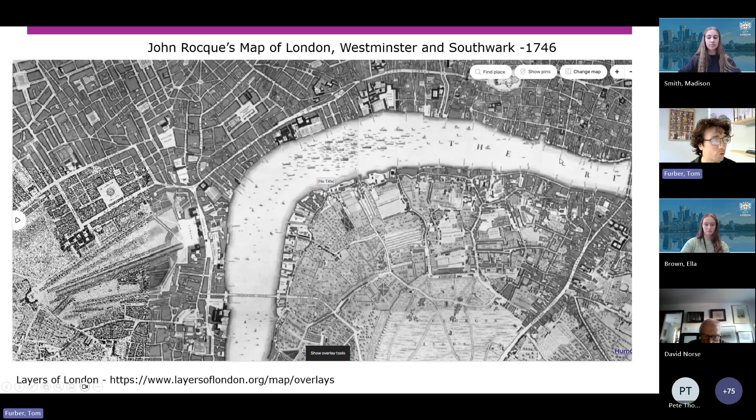One of the very big changes that comes to the River Thames in the 19th century is the building of the Victoria Embankment, built in the 1860s. The story of the building of the embankment is most closely linked to the huge sanitation and sewage problems London faced in the 19th century. The increase in population, and the rudimentary, incremental but not full progress when it came to dealing with human and other waste, meant more detritus, human, industrial and otherwise, was ending up in the river than ever before, causing all manner of problems. A new sewerage system was built under the auspices of the Metropolitan Board of Works and Sir Joseph Bazalgette to deal with that sewage problem.

That's the most famous story we think of when it comes to the embankment, but as this image from the Illustrated London News shows, there is much more to the embankment than a sewerage system. We can see the sewage system there, and also two types of railway, the more familiar steam railway, but also a pneumatic railway that briefly ran. We can see a river wall, a sea wall, being built alongside as well. This is now part of over 200 miles of walls that line the river from the mouth of the river to Teddington, where the tidal portion of the Thames ends. As an aside, one speculation of the etymology of Teddington is 'tide ending town.'

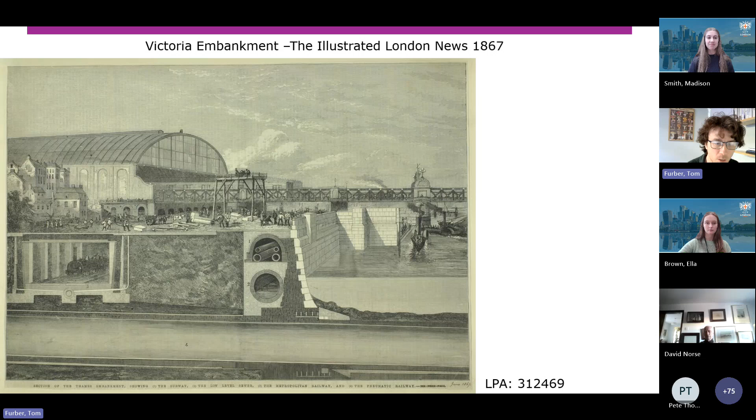One way we can compare and get a sense of the changes of the River Thames, and other changes in London, is with a great online resource called Layers of London, which the London Archives and many other archives, libraries and institutions have contributed to. If you're interested in London history, or in the course of the river, I really can't recommend this source enough. What Layers of London allows you to do, as the name suggests, is overlay various maps of London on top of each other, historical maps and contemporary maps as well.

The maps have been geo-rectified, a process where you take an older map with a lower standard of accuracy, and a modern satellite derived map, find matching points on each, and then make the older map conform to the accuracy standards of the modern map. You lose something of the artistry when that happens, because it distorts and pulls the older map in different directions. But what you gain is the ability to make a direct comparison of then and now on a geographical basis. If we do that with the Rocque map, again from 1746, you really get a sense of how much of the river was reclaimed during the 19th and 20th centuries.

Indeed, one Victorian engineer, James Walker, puts it very vividly. He says that if the walls were removed, the Thames would, at the very next tide, take possession of a large space that had been so long abstracted from it, and would be generally five times its present width.

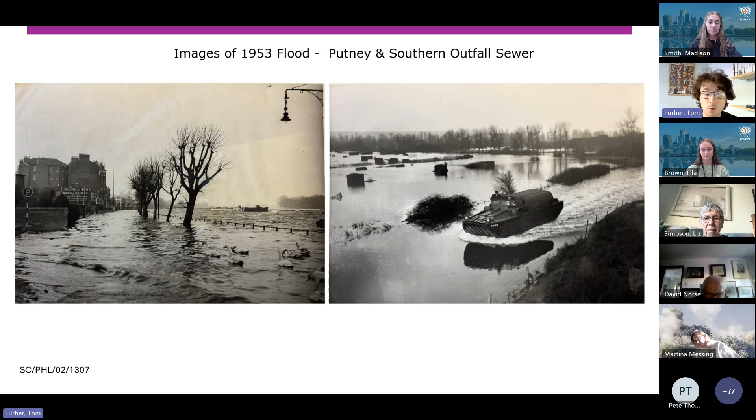As you might imagine, this prompted many concerns about flood defences for the future, and these are addressed in a public information film from 1975, which I'll play now. Any issues with the sound, please let me know. I will say it is an old film, there's a bit of an issue with the quality - it sort of pulsates slightly, giving it an unintentional psychedelic effect, which I hope adds to the charm rather than is a distraction. So I'll play that for you now.

Tide levels have been increasing steadily, particularly since the late 18th century, when a recorded tide reached almost 14 feet above the Newlyn sea level line. During the next 100 years, a clear pattern was emerging - each isolated, exceptional high tide was higher than the last. By 1928, a high tide had reached 17 feet above the Newlyn line, and London's defences were overtopped.

Those defences were improved and strengthened in 1930. But in 1953, a high tide again overtopped them and breached defences in many places in the lower estuary. By 1972, new defences had again restored the safety margin. But even these defences are not a permanent solution, and as the trend of higher tides continues, the question must be asked: when will London be faced with a total flood disaster?

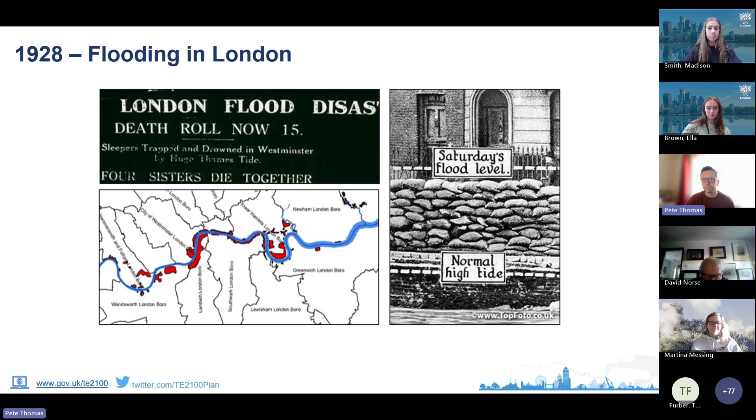Tom also touched on 1953. It was a huge East Coast tidal surge that came down the North Sea. London was largely spared, but that was only because of very significant flooding towards the mouth of the Thames estuary. Water levels were almost 0.5 metre higher at Southend than in 1928, although only 16 centimetres higher at Silvertown in London.

Over 300 people died in England, many of those in Essex. One person died in London, and that was due to gas exposure rather than directly from the flooding. Over 25,000 properties were damaged, 30,000 people evacuated, and over 100,000 acres of land was flooded along the coast. As Tom alluded to, the impacts were even greater in the Netherlands, where over 1,800 people died.

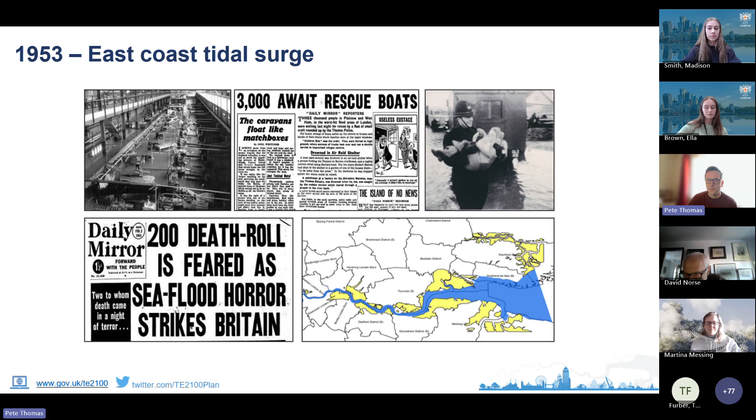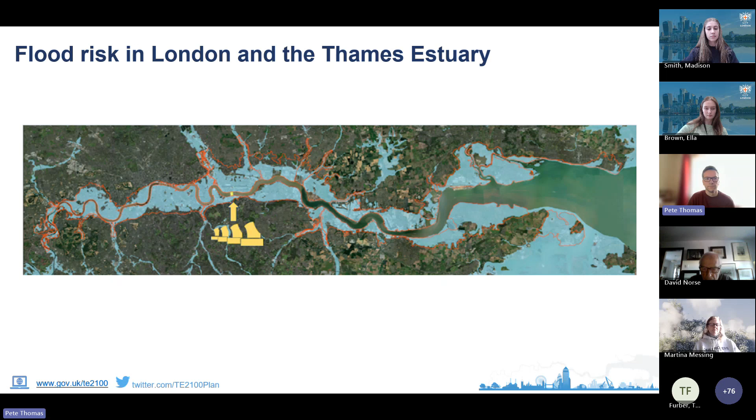So a bit of information about some of the existing flood defences in London. Some of them are now well over 150 years old, deteriorating with age and through increased use through climate change. Some of the defences are part of buildings, others intersect with bridges and wharves, and some are close to or actually part of World Heritage Sites.

This photo is of the defences near Trinity Hospital in Greenwich on the South Bank. In the top right, you can just see that white tower with the clock face - that's Trinity Hospital. This photo is regularly used by the EA. You can see multiple lines of defence raising over the decades, up to about 5 levels of raising here. That's been reactive to past flooding rather than strategic looking ahead.

It's not been planned. So you've got the 1879 Flood Act, you've got another raise later in the 19th century. After the 1928 flooding, you had the 1930 Flood Act, which then raised even further. And then the top concrete section - those were the interim defences constructed in the 1970s during the construction of the Thames Barrier, post-1953 flooding.

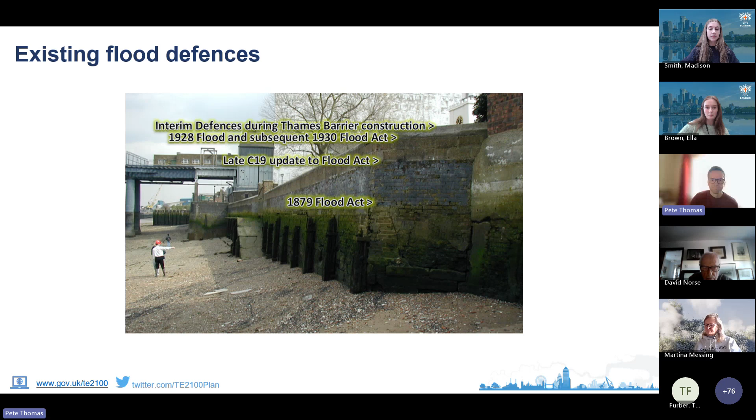So onto the Thames Barrier. The decision to build a barrier was based on a report by Sir Herman Bondi in the 1960s, who reported that a major surge tide in London would be a disaster of the singular and immense kind. It would be a knockout blow to the nerve centre of the country.

Ultimately, Charlton or Woolwich Reach was chosen because it's straight, it's quite deep, but it's not over wide. That kind of straight reach is important for navigation, so boats can straighten up around a bend and safely pass through. Construction of the barrier as we know it began in the 1970s, led by the Greater London Council, as it then was.

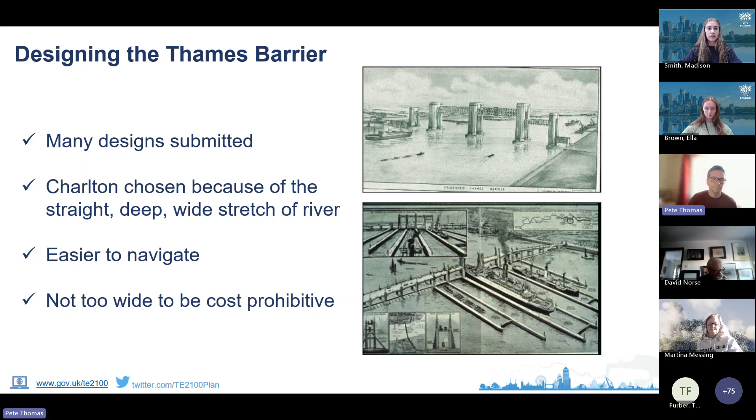So the main objective of the Thames Barrier is to prevent tidal flooding in London. It has multiple power sources, the gates operate independently, and it needs to have total reliability to operate when it's needed. We work closely with the Port of London Authority on navigation, and we think the annual closure limit is about 50 to minimise the impact on navigation and ensure we've got sufficient time to maintain the barrier.

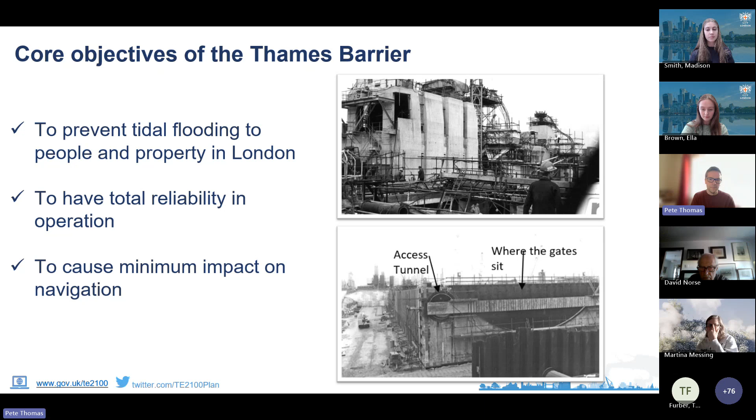So there's the Thames Barrier. I'm sure you probably all know what it looks like. That was completed in 1982. It was first operated in 1983 and officially opened by Her Majesty the Queen Elizabeth II in 1984. It cost £461 million in 1982, and that's about 1.5 billion in today's money. And about £100 million, or £300 million in today's money, was used on those interim defences, that kind of extra concrete section on top of the defences through London while the barrier was being constructed.

It's one of the largest movable flood barriers in the world. The upstream walls and embankments are lower to allow greater use and enjoyment of the river while keeping the day-to-day tides within that river channel. The Thames Barrier itself is closed when surge conditions threaten to overtop those defences in central London.

And the next slide is a fairly basic video of actually how the barrier works. Hopefully this sound works now. Please shout if it doesn't.

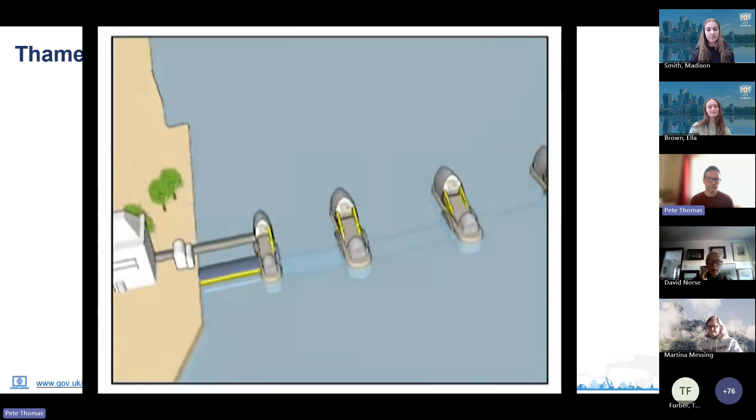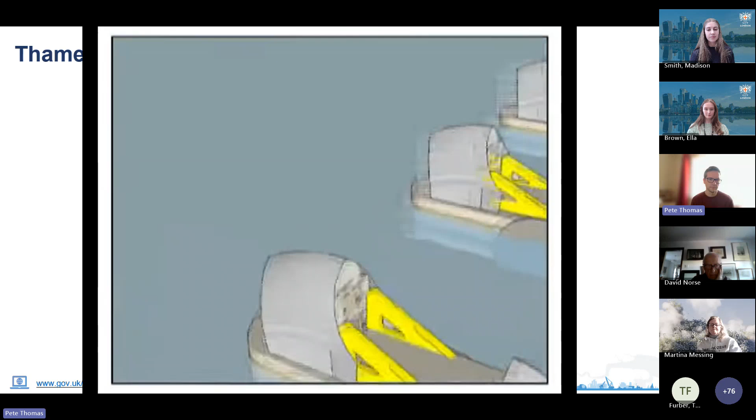The Thames Barrier is the main defence against flooding for London and is sited across a 520-metre section of the River Thames. The Thames Barrier has two types of gates. Falling radial gates, these gates sit above the river, making these sections non-navigable. Rising sector gates, these gates rest on the river bed, which allows river traffic to pass through the barrier.

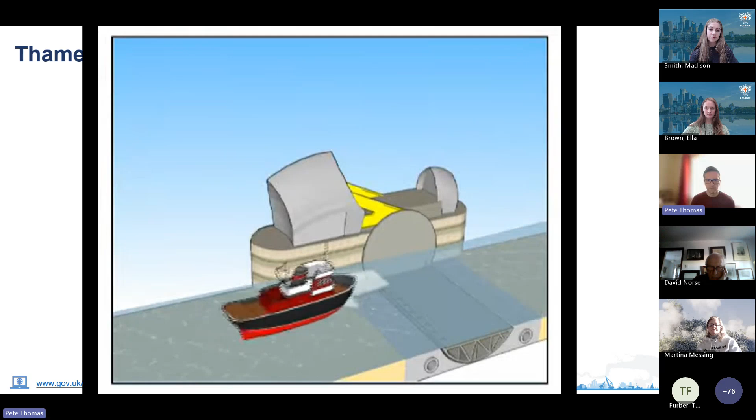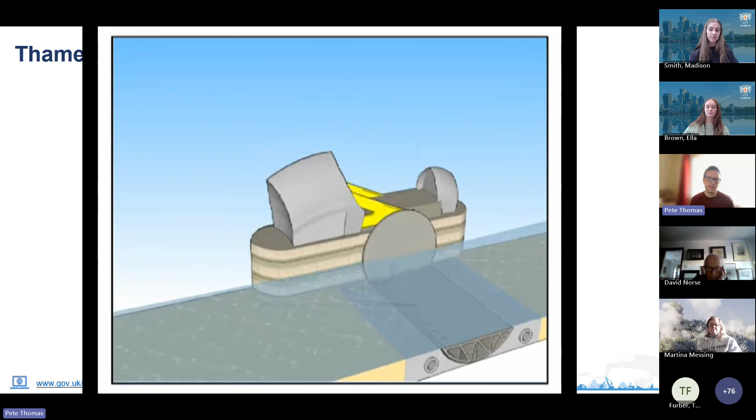In the open position, the gate lies flat with the river bed. This allows the tide to ebb and flow naturally and river traffic to pass through the gates. Hydraulic cylinders are used to rotate the gates into position. Individual gates can be closed in 10 minutes, but the whole barrier closure takes 1.5 hours. The closure usually takes place soon after low tide. When fully raised, the barrier creates a solid steel wall, preventing water flowing upstream towards the capital.

The four main gates span 61 metres and weigh over 3,300 tonnes each. Each gate is 20 metres high and can hold back loads of up to 9,000 tonnes. The underspill position assists the opening process, as a controlled amount of water is passed under the gate and up the Thames. The Thames Barrier can only be reopened once the water level upstream of the barrier matches the level downstream.

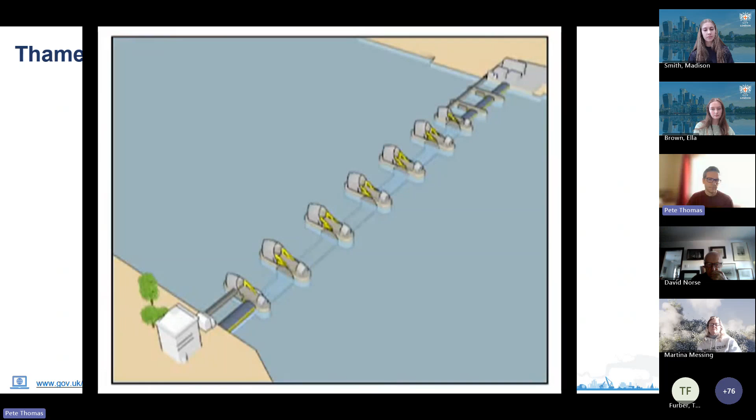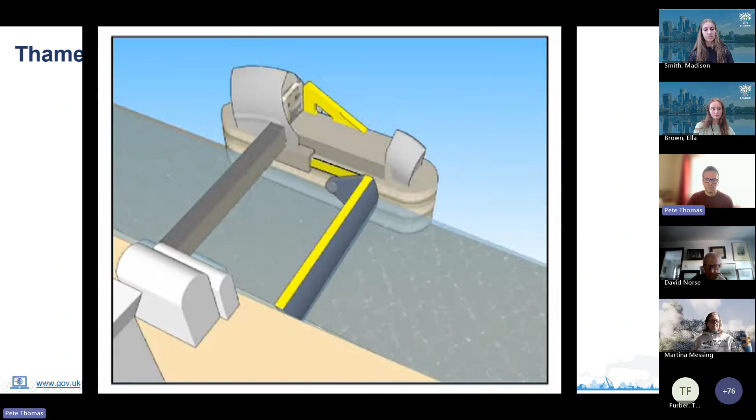The maintenance position allows the barrier engineers to service the gates and keep them in working order. The falling radial gates are sited towards the banks of the river. These gates are held in position above the river, are non-navigable, and are drawn when required. The protective walls downriver have been raised to provide the same standard of protection as the Thames Barrier.

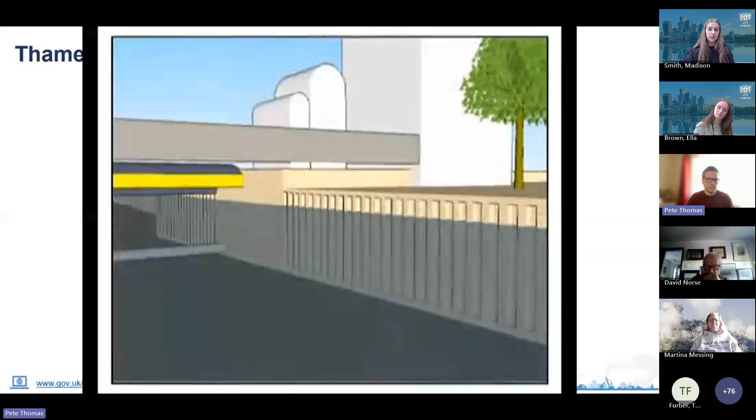So the tidal defence network is more than just the Thames Barrier and a few walls. There are in total 9 major barriers - the Thames Barrier and 8 other major barriers, one of which is shown below, Dartford Creek Barrier. There's more than 300 kilometres or 200 miles of walls and embankments, and over 400 other active assets or defences like floodgates and outfalls, and they all work together to protect the Thames estuary.

These defences are vital for allowing us to get on with our day-to-day lives in London and the estuary. While the major barriers and embankments in Kent and Essex keep out the biggest storm surges, the river walls in London contain the daily high tides. The system works as one. Without the barriers, we'd be at risk from major storms, and without the walls, we'd need a permanent barrage across the mouth of the estuary, and London would lose its daily ebb and flow of the tide and the vital biodiversity and habitats that brings.

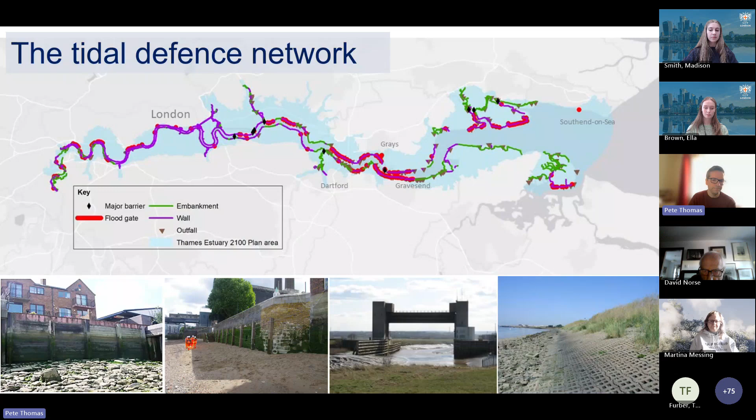This is what's protected by the network of defences throughout the estuary. The Thames Barrier, shown in yellow there, and the other defences have protected us from flooding 221 times since it was completed in 1982. On average, it closes about 5 times a year, protecting over £400 billion worth of residential property and over 1.5 million people, many businesses, some of the country's most valuable assets, critical infrastructure, transport networks, as well as internationally protected habitats, valuable heritage and cultural assets.

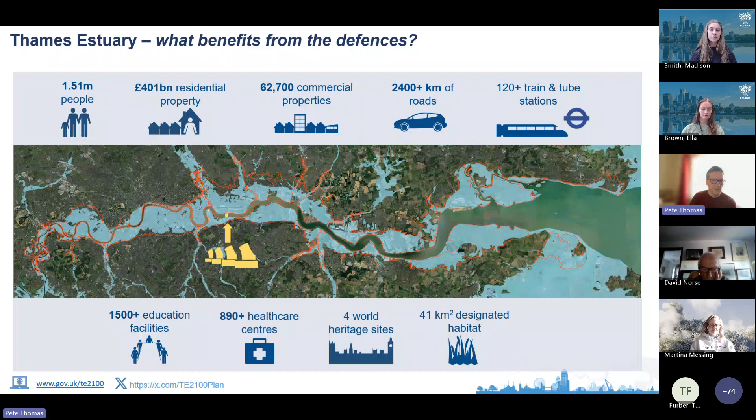Now the challenge we're facing. At the top right, local temperatures in the UK are increasing, as well as around the world. Winters are getting wetter. On the left, sea level rise is accelerating. Observed water levels in London and the estuary are increasing, roughly in line with recent climate projections.

So what does it mean for the estuary? We're planning for up to 1.15 metres of sea level rise by 2100. Alongside rising sea levels, we're also seeing more frequent storm events, testing those defences more than ever. And on top of that, the defence system is actually getting quite old.

You can see here these defences - this is, or was, Duke Shore Wharf in Limehouse. We had to undertake emergency works here back in 2017, I think, because that defence was at imminent risk of failure and could have led to the collapse of the buildings behind.

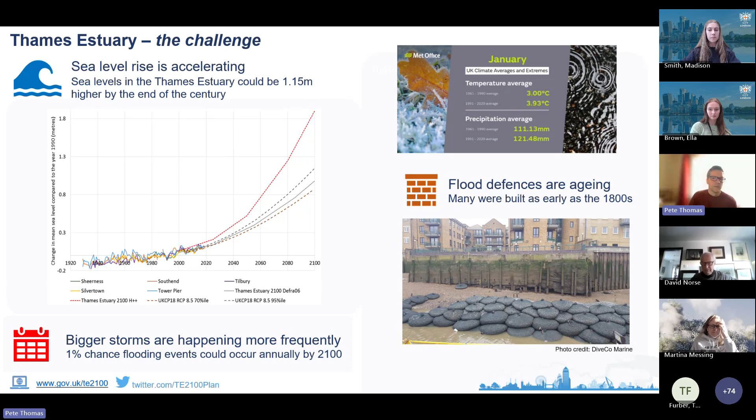So what's the plan? The Thames Estuary 2100 plan was first published in 2012 and had a full update in May 2023. It's the first adaptive flood risk strategy developed in England, and it uses a flexible approach for adapting to an uncertain and changing situation like climate change. We monitor key indicators like sea level rise and new climate change science, and the adaptive nature of the plan allows us to respond, take a different course, or change deadlines depending on changes in the estuary and the climate.

The plan maps out a series of flood defence options and decision points that, if delivered successfully, can continue to protect people, property, and the environment of the estuary. However, and this is quite key, the Environment Agency is only responsible for maintaining 12% of the flood defences in the estuary. So it's vital that we work together with landowners and other organisations who are responsible for the remaining 88%.

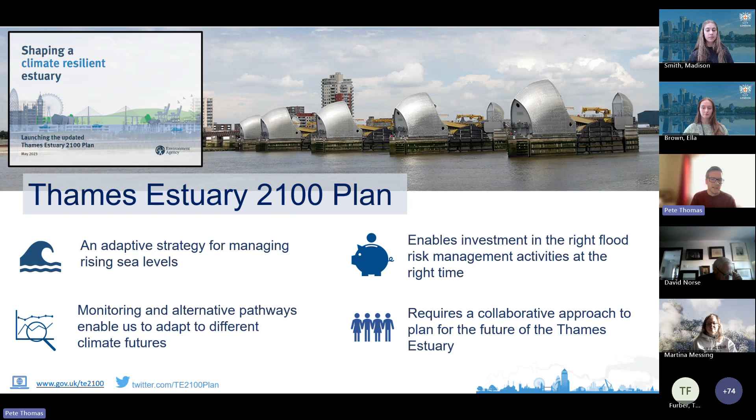Some of the defences are already at the right height, but others aren't. This will reduce our reliance on the Thames barrier, keep the number of closures at a manageable level, and prolong its lifespan to 2070.

By 2040, we've got a really key decision point, and we need to decide what that end-of-century option is going to be, so it's in place for 2070 by the time the existing Thames barrier is at the end of its life. We know it will take several decades to fund, legislate for, design, construct and test such a major piece of infrastructure, so it's ready for 2070. That key decision point is 2040.

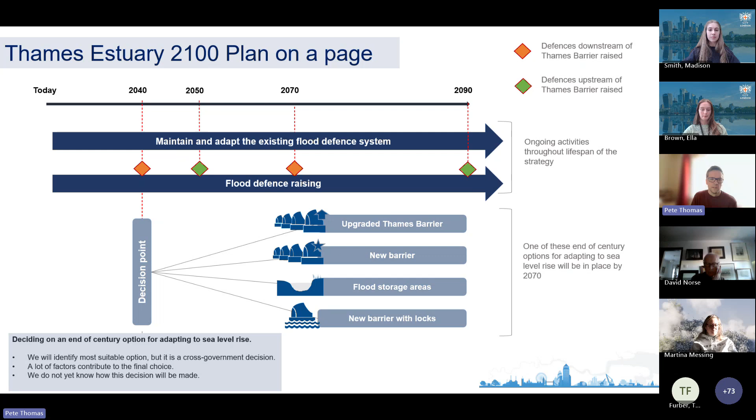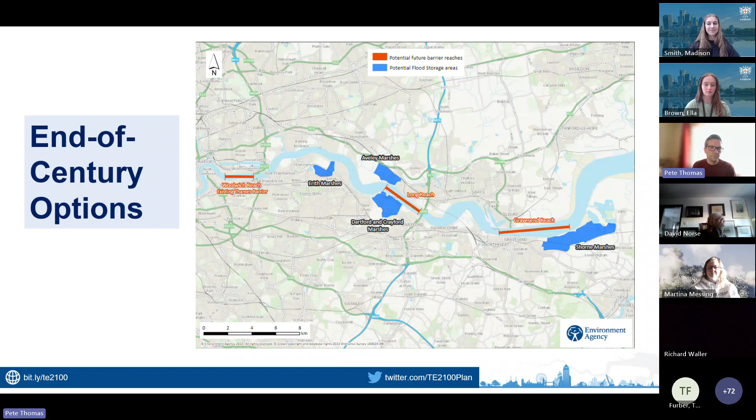Now changing tack to some wider messages about flood risk and what you can do to prepare for flooding. We have a page on gov.uk where you can check your long-term flood risk. You can put in your postcode and check if you're at risk of river or tidal, surface water, and also the impacts of climate change on those risk sources.

If you're at river or tidal flood risk or groundwater risk in some areas, you can sign up to receive our flood warning service. That's all free, and you can receive alerts by text, phone, or email.

If you're at surface water risk, we recommend you sign up for the Met Office weather warnings, as it's not currently possible to give flood warnings at a property level for these short, sharp downpours that cause surface water flooding.

We have guidance for preparing a flood plan, whether that's a personal one, at a community level, or for a business. And if you own property or land next to a river, you may be a riparian owner of the river and the defences, and more information on that is on gov.uk.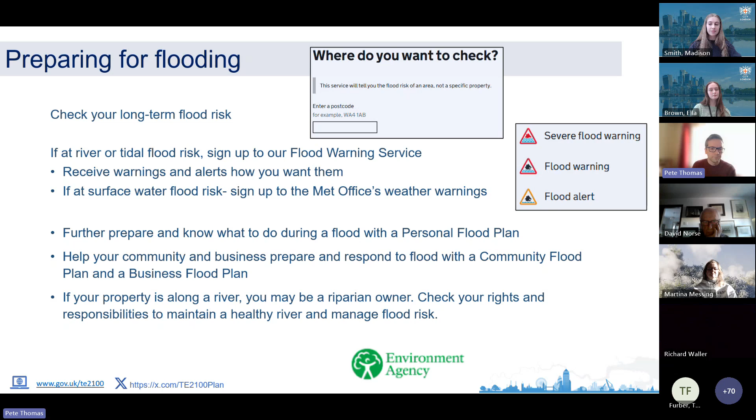The final slide is just some links around information and preparing for flooding. So that's the end of my presentation. Thank you very much for listening.

Pete, that was really interesting. We've got a few questions, and the first one is directed at you. I know you might have briefly mentioned it, but how often are the Thames barrier gates closed? Is it mostly for emergencies, or is it more of an everyday occurrence?

I mentioned it's been closed 221 times, so on average 5 times a year. There are clusters of closures depending on when there are particular spells of bad weather. The full closures are just for emergency use, so that's that 221 times. But we do partial test closures every month just to make sure things are in working order, and we also do a yearly full test closure of all the barriers and gates, I think every September, during high spring tides.

Are there any other significant flood barriers around the world that are similar to the Thames flood barrier?